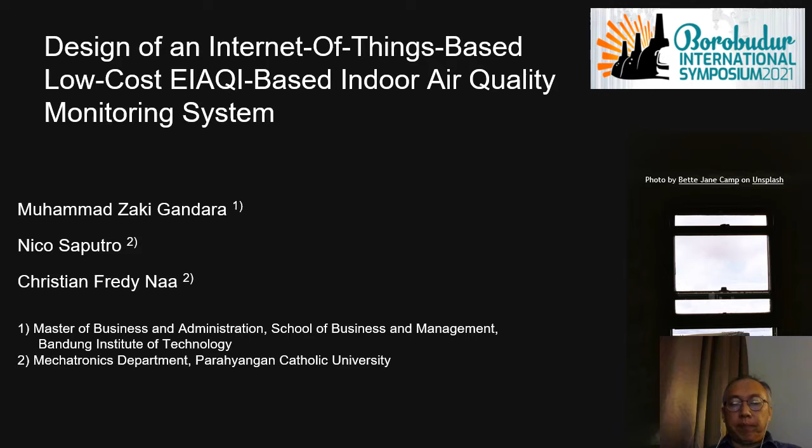Our motivation to do this research is because not many of the existing buildings have their indoor air quality monitoring. Even I don't have it at my home. On the other hand, most people, especially elderly and young children, spend around 90% of their time indoors. And now during the pandemic, I think they have spent 100% of their time indoors.

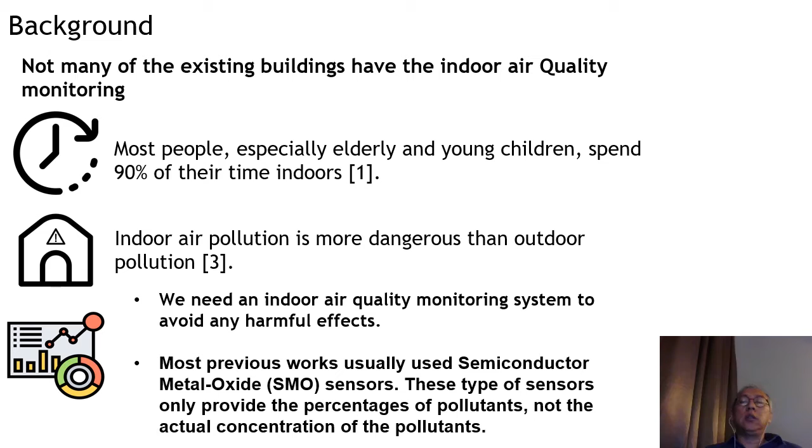Studies show that indoor air pollution is more dangerous than outdoor pollution. Therefore, we need an indoor air quality monitoring system to avoid any harmful effects. Moreover, most previous work on indoor air quality monitoring usually uses semiconductor metal oxide sensors. This type of sensor cannot provide easy to read information, because it only provides the percentage of the pollutants and not the actual concentration of the pollutants.

The aim of the research is to implement a standard indoor air quality measurement system that provides easy to understand indoor air quality information using low-cost sensors, and to integrate the system to ThingSpeak, a cloud-based IoT analytics, to form an IoT-based system.

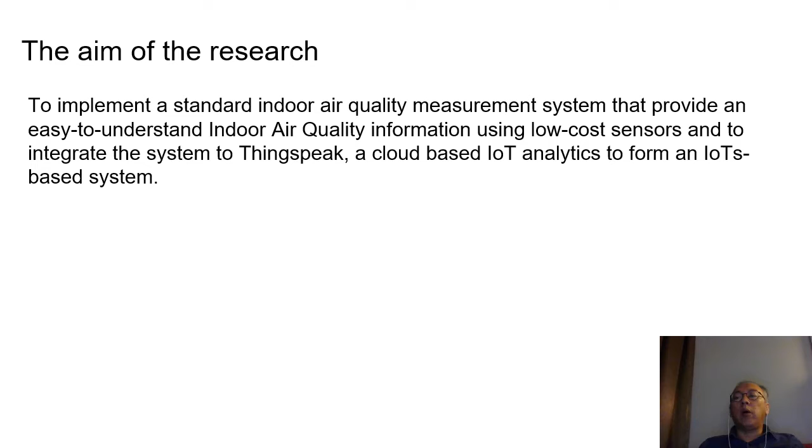Our methods for designing the proposed system are as follows. First, we determine the pollutant. We chose two pollutants, carbon dioxide and particulate matter. We also measure the temperature for the thermal comfort. Second, we did research about sensors that met the following criteria: availability, price range, and also it must measure the typical indoor pollutants.

After we found the sensor that met all of the criteria, we started to develop the sensor system, and then we did the calibration of the three sensors to make sure that they're working properly. And then we design the experiment. Based on the experiment design, we determine the source of the pollutant for the experiment. And also we design and build a measurement chamber according to the scenario for the experiment.

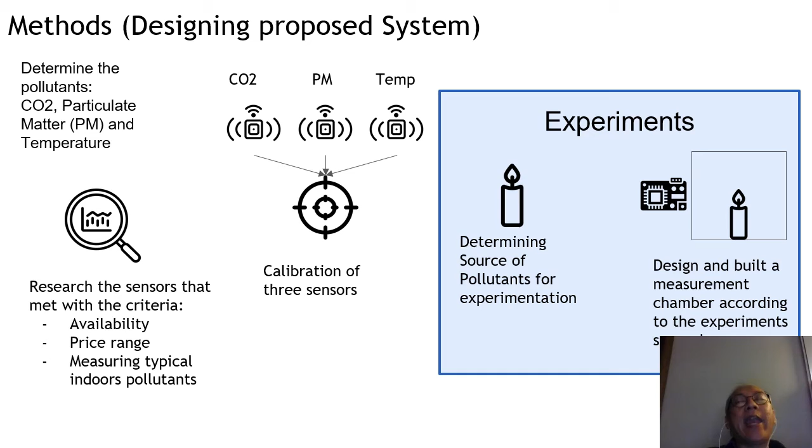In our approach, we use an enhanced indoor air quality index, or EIAQI, which is a standard indoor air quality measurement system that is built based on US EPA's standard of air quality measurement, air quality index. Therefore, there will be some conversion process from the sensor reading into the index.

As you can see in this figure, first we will convert the sensor reading into two sub-indexes. The first index is AQI, or air quality index, and the second index is the thermal comfort index, or TCI. Then after the conversion, each index will be given a weighted value. After we derive the weighted value, the next step is we determine the smallest weighted value between the two pollutants, whether it is CO2 or PM, or particulate matter.

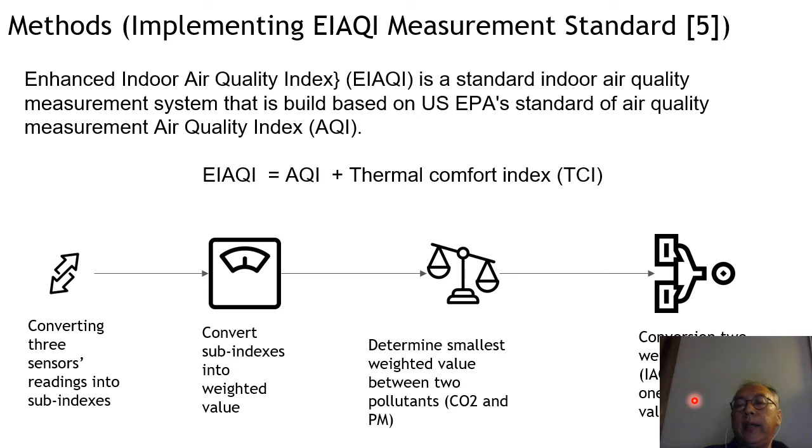The next step is there will be a conversion of the two weighted values, AQI and TCI, into one EIAQI index value. Converting the three sensor readings into sub-indexes, we use the following conversion equation. You can see here all of the definitions of the parameters. As an example of the result, you can see it here.

So there will be a sensor reading for carbon dioxide and also for the particulate matter and the temperature. And this is the equivalent index created from this conversion equation. And then we can give a label for each range of index. For example, you can see here if the index value is between 75 to 100, the status is good. While when the index is from 0 to 25, it is hazardous.

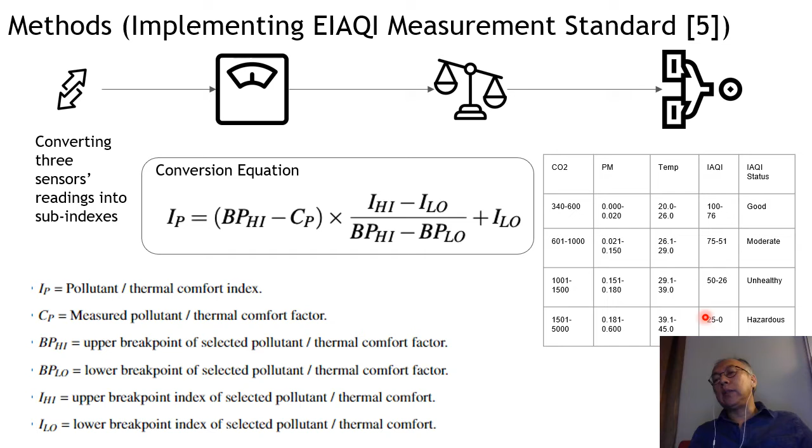Then after we got the index value for IAQI and also TCI, for each index we give a weighted value. For instance, you can see here for the IAQI, the weight is from 3 to 1 and -3 if the range of IAQI is from 0 to 25. And on the right side, you can see here the weighted value is from 3 to 1 and 0.

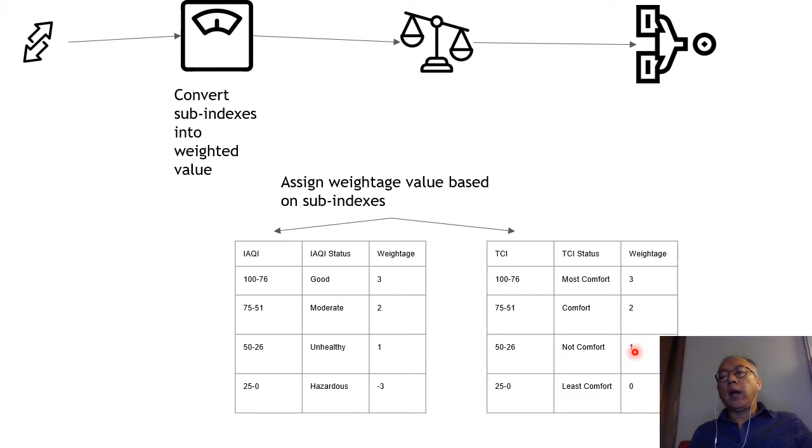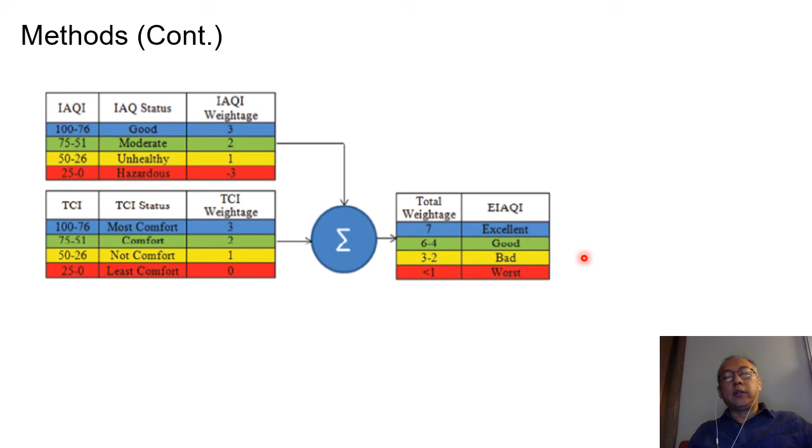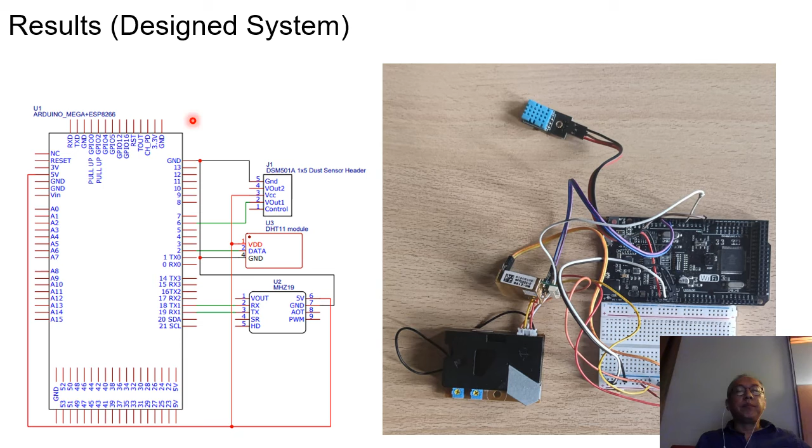As you can see here, this is the prototype of our device. It has 3 sensors here to capture the environment information, the pollutants, and also the temperature. And then this is the schematic diagram of the proposed system. And here's the measurement chamber that we built. Basically, the measurement chamber on its side has a hole that we can open or close, and we will use it for experiment purposes.

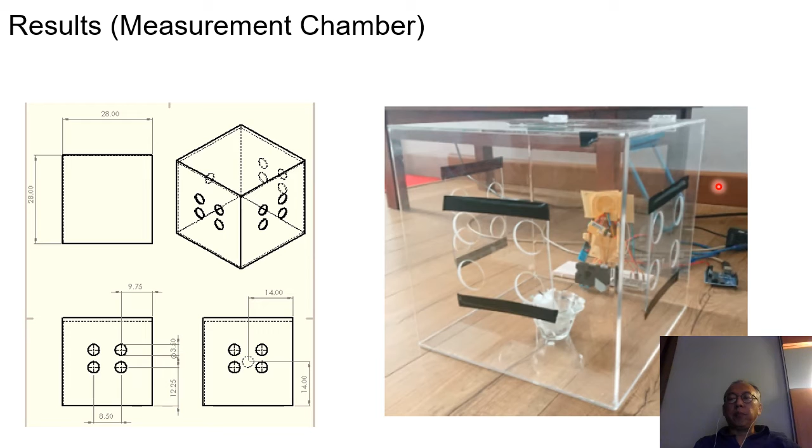We use the measurement chamber for sensitivity analysis to investigate the device performance on the fluctuation of the pollutants and temperature. We define 4 conditions for the experiment. The first condition is when only one side of the measurement chamber is open. In other words, the hole in one side of the measurement chamber is open, so there will be some flow of air from the outside of the measurement chamber into the inside and vice versa.

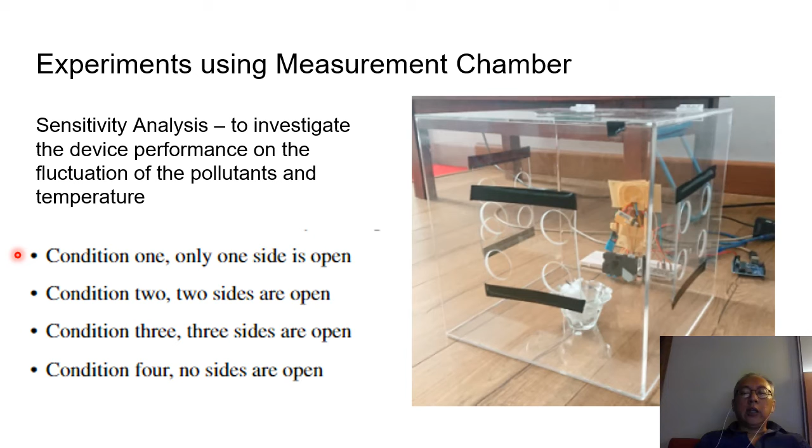In condition 2, 2 sides of the measurement chamber are open. In other words, there will be more flow of air from inside to outside and vice versa. Condition 3 is when 3 sides are open, and the last one, condition 4, is when none of the measurement chamber sides are open. In the experiment, we use a candle and put it inside the measurement chamber to generate carbon dioxide, PM, and temperature.

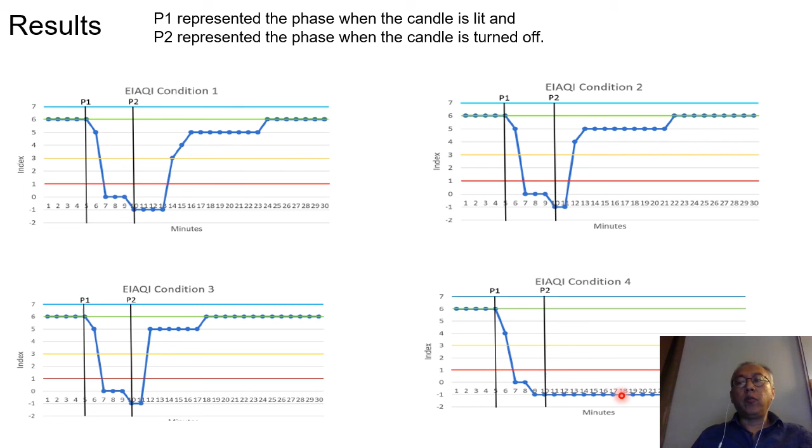Line P1 indicates when we burn the candle, and line P2 indicates when we turn off the candle. As you can see here, when we burn the candle, the index drops quite fast, and then after we turn off the candle, it takes some time before the index goes up again and back to the original value. You can see here that for conditions 1, 2, and 3, the index goes back again to the initial value, but in condition 4, the index never goes back to the initial value.

The experiment result also shows that as the flow of air from the outside into the inside of the measurement chamber gets bigger, the faster the index value goes back to its initial value. So as you can see here, when only one side is open, it takes 14 minutes. Two sides open, it takes 12 minutes, and when three sides are open, it takes 8 minutes for the index to go back to its original value after a significant drop. While in condition 4, it never goes back to its original value.

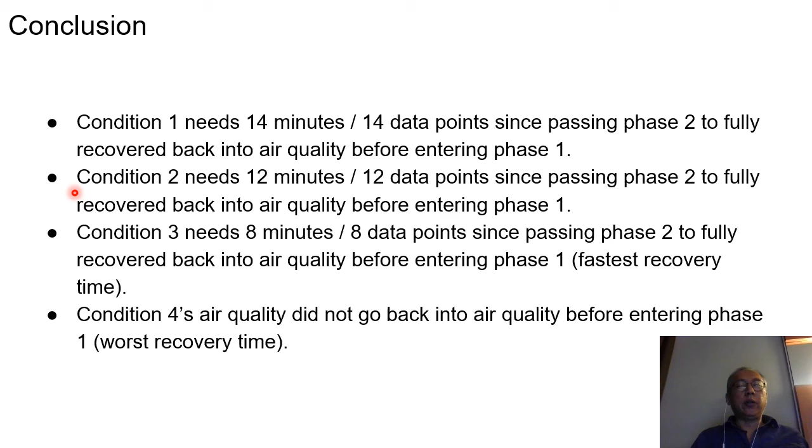As an overall conclusion, the experiment in the measurement chamber showed that the proposed monitoring system works properly and can be used for indoor air quality monitoring.